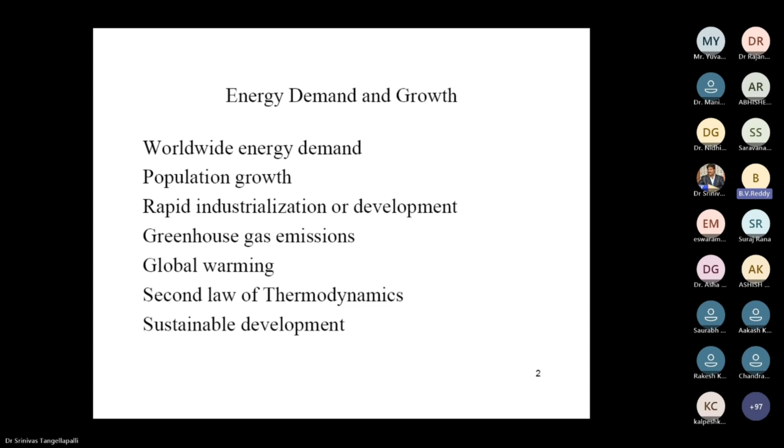And from time to time, when major countries, depending on how the political system comes, the system also has an impact. The previous US administration had a different view. Now the present administration thinks it's time to go after oil and gas again and use more of those resources. So again there will be more demand for them, more utilization of them.

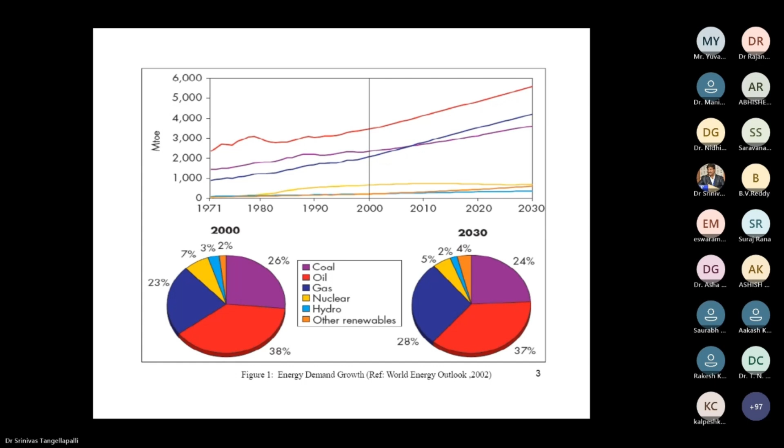So what I thought was, instead of straight away jumping into combined and multi-generation systems, which is where the growth is now, it's good to look at where we started. I'm not going to speak on this much, because this is what we typically teach energy students or in thermodynamics in general. People even today conduct a lot of research. Don't think that people are not doing research. They are.

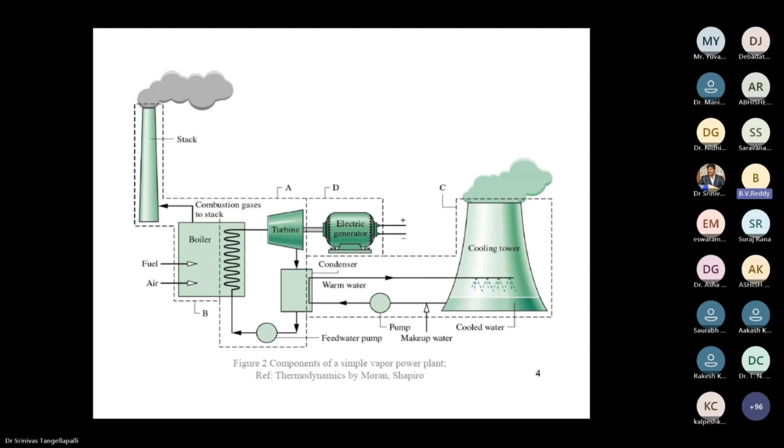So as I said, there are many people, from industries to universities, still doing research on cycle configurations, operating conditions, steam parameters, blade conditions, the role of advanced materials, all aimed to improve the efficiency so that emissions come down, economics improve, and many other things favor the system.

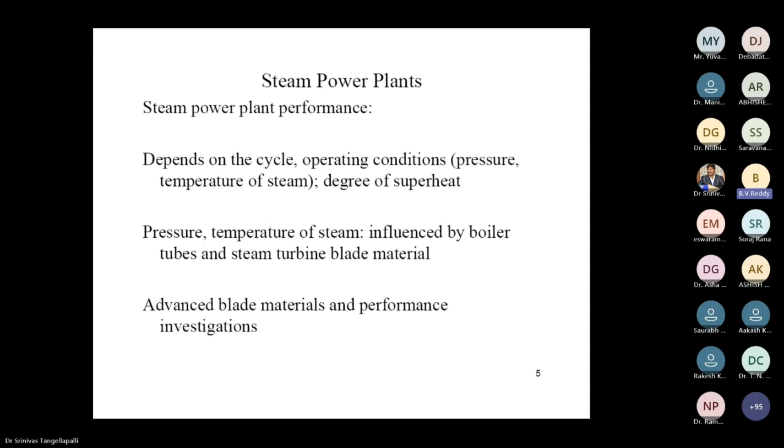Yeah, next one, please. Can you put the next slide before we come back to this slide, Srinivas? Yes.

So we control the air-fuel ratio in these combustion chambers. When the air-fuel ratio is controlled, the condition of the gases leaving, the pressure and temperature, is such that it meets the gas turbine blade requirements.

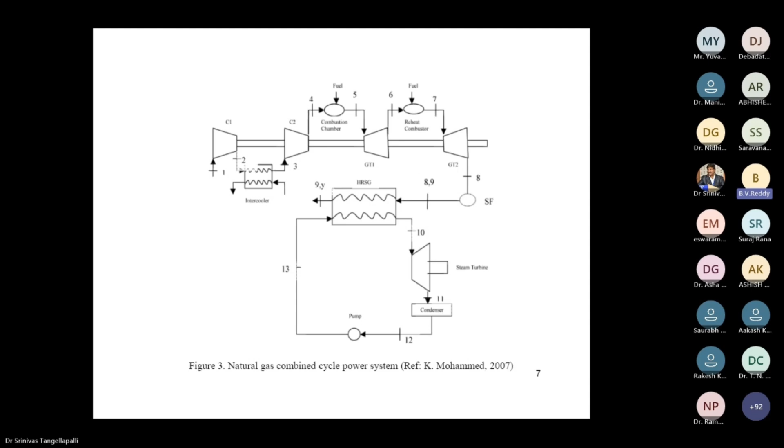Next slide, please. Yes. Oh, Srinivas, can you go back to the previous one?

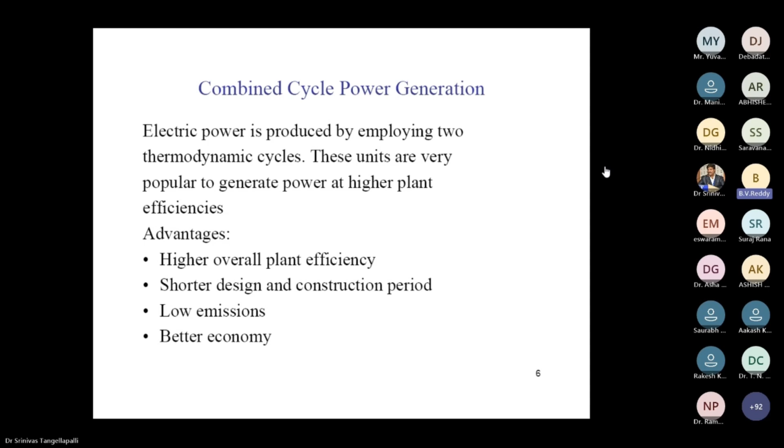Yes, no, the previous one. Okay. So now, keep in mind, this is how my approach is.

If we are attending any workshops, they're typically aimed to give not one equation and how to solve that equation in depth and get results. They should give you areas where developments are happening, opportunities are growing, so that depending on whatever role you may be, some of it will help you. So whatever the combined cycle I was speaking about, people are doing research, people are publishing, and as a participant, what is it that you will benefit other than just listening? There is a lot of research opportunity in these areas.

As I was saying, if it is a natural gas fired combined cycle, how do we address bringing down the emissions? Is there a way to co-fire? Yes, natural gas and biomass co-firing can be incorporated. I'll show you some of the work conducted by one of my postdocs in a few minutes. You can also look at different operating conditions, plant combinations, and see how the emissions will reduce, what impact it will have depending on what sort of biomass we are using, and the economic studies.

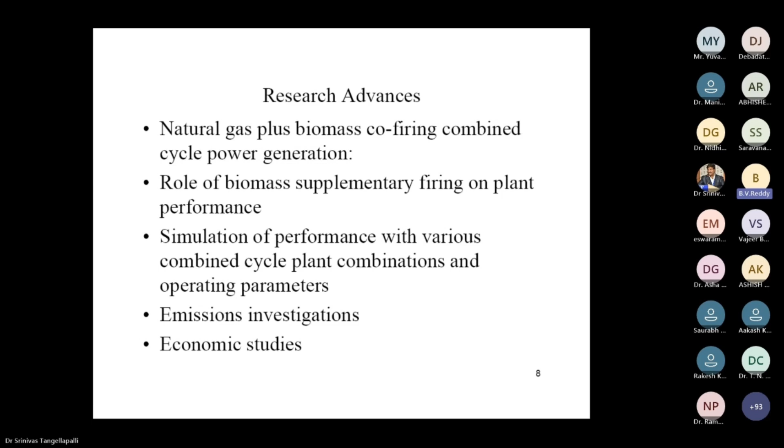So whatever titles you see here, all of these offer research opportunities. Given the little time a presenter will have, like 1 hour or 1.5 hours, they can't show all the research or papers. But I do share a lot of paper title links with Professor Srinivas later, so he can circulate them to interested participants afterwards. Next one, please.

If you notice this one, I had shown you a natural gas combined cycle. I explained the benefits associated with the combined cycle, what research people are doing, whether it is energy, exergy, supplementary firing, parameters, many things. Then I showed you why we need to think of utilizing biomass, because as you know, biomass is carbon neutral. Whatever CO2 it releases, it captures back when it is grown. So typically it is considered carbon neutral.

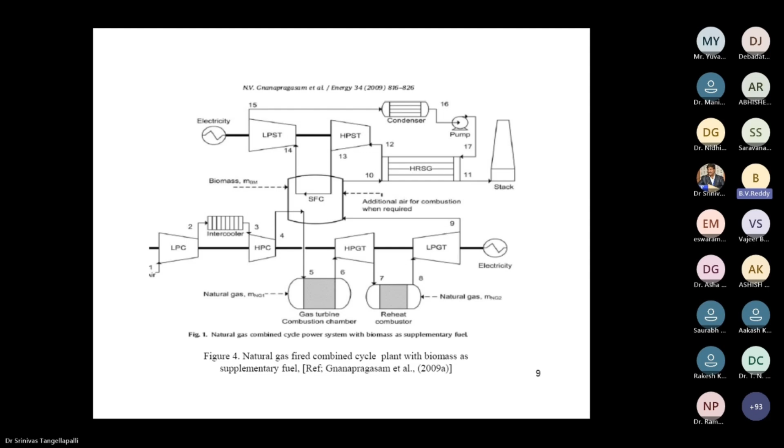This runs in pages of equations where this was a postdoc who worked with me and another professor, conducted a lot of research. It was published in a few journals. The story here is it leads to a lot of benefits.

In biomass, there are a lot of biomasses. For selected cases, natural gas is considered, with its typical composition and calorific value. Then selected biomasses were chosen, whether it is wheat straw, wood chips, or some other wood. Even within what we call typical biomass, it could be wheat husk or rice husk. What is wheat husk grown in North America versus what is grown in India or some other place? We need to do chemical analysis again. We simply can't use what is used in North America the same way as in other locations.

So the whole idea here is from a research point of view, analysis was proposed covering the chemical side, thermodynamic side, gasification side, all combinations involved. Different biomasses were used and studies were conducted, and it was found that biomass addition as a supplementary fuel to that combined cycle, originally fired only with natural gas, has a significant role in reducing carbon dioxide emissions, which is one of our main concerns today. So there's still a lot of scope to look into combination of the plant, combination of parameters, types of biomasses, and other things including economics. This area still offers a lot of opportunity for research investigations, projects, and publications.

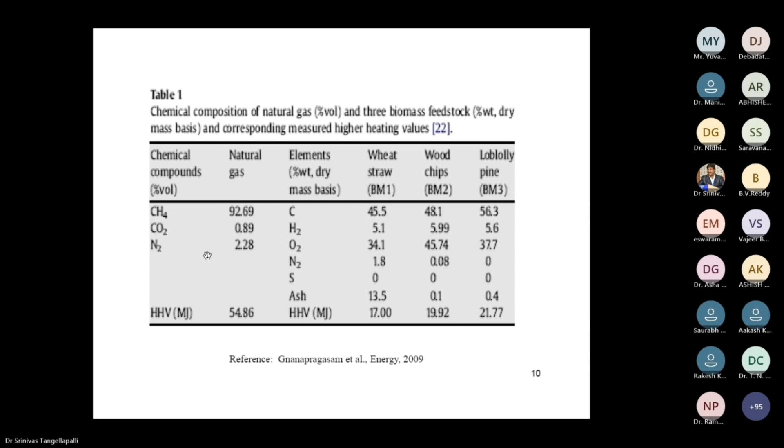In continuation, as I said, the way I put material is to link one after another. I started with natural gas combined cycle, which is a highly efficient technology, heavily used worldwide. Then I talked about how to reduce emissions, and we went on to biomass incorporation. Why only biomass? People talk a lot about solar. I know there's been a lot of interest in solar over the last 15, 20 years. It's one of the fastest growing renewable energy contributions in the energy mix of the globe, and in a lot of places that is mostly done through the PV route. But I'm not talking here about PV.

What is the way that solar can be incorporated into this combined cycle? If we can have natural gas with solar in a combined cycle mode, that also will benefit because solar is renewable. Depending on how we are clubbing it, how it is incorporated, what sort of role in the system, operating conditions, so many things come into play. Then one needs to compare - if it is a natural gas plant, let's say 600 megawatts, versus a solar-natural gas combination with different proportions, how do the economics and emissions look? So there is a lot to do here - apart from PV, solar can be utilized with fossil fuel power plants to bring down emissions. That means looking at this comparison.

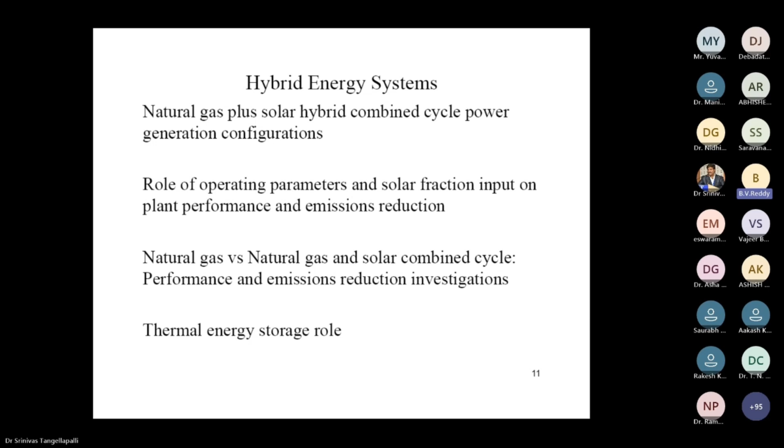And the last point - solar is available during daytime, not nighttime, but we generate power at night too. So there's a need to think about storing solar energy and using it when it's not available, like at nighttime. The whole story is from looking at configuration, to the role of the system, modeling and experiments, to comparing, to bringing in energy storage - all these areas have people conducting research, industries doing work, publishing, but still from a research and opportunity point of view, this area provides vast opportunity.

Yes, you can see this.

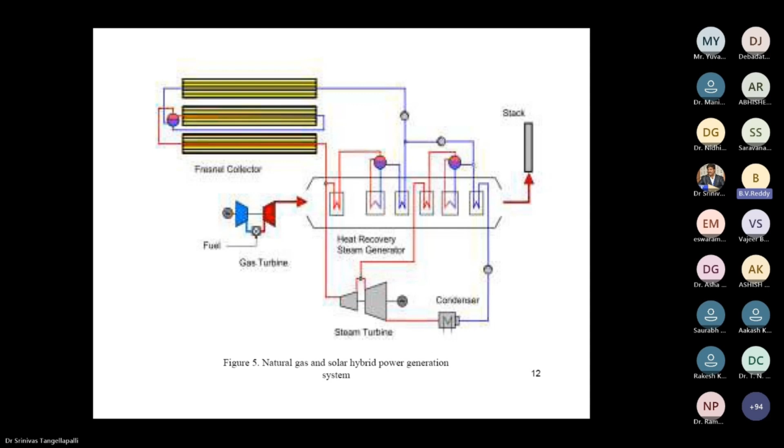So what I'm trying to say is, from a research point of view, not only having natural gas with biomass as combined or co-fired mode, there's a lot of room for natural gas with solar in a hybrid. What you see here, again, there could be many possible configurations, not one. You may see some work being done, but don't think that is the end of it - no, this is only a beginning. A lot of people are conducting a lot of research to contribute to seeing the role of different things.

So if you notice, I put combined cycle natural gas, then I went on to show modification using biomass and typical work. If I have time, I will click on the journal papers and go over them, but I will share all those paper titles with Professor Srinivas so he can share with you those titles, which you can download - these days most of you have access to the journals. Then I showed what developments are happening with natural gas combined with solar - that's a hybrid version of it. Now if you notice, this is a different system, but still going with the approach of combined cycle.

If you notice, first let me explain. As I said, people typically spend 6 to 8 months generating a lot of this work. When somebody is trying to speak in a few minutes, everything cannot be put in.

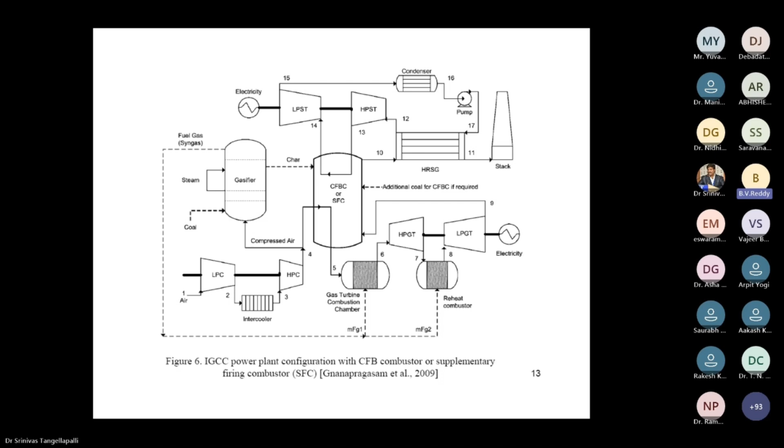Yes, that's where I put it in brief. As you can see, from gasification to doing system analysis, parametric modeling, thermodynamics. This one I won't talk about here. The hydrogen, I have another system where I'll be talking. As you people know, hydrogen is now one of the very popular growing energy technologies with a lot of attention paid, which I will be discussing a little bit. And the supplementary role: as I said, instead of coal, if you use biomass, there is a role to reduce emissions, CO2 particularly. Again, the type of biomass has an impact, and many other things.

And as I said, you have seen energy analysis here. There is also exergy, which I'll be speaking about at the end: why exergy in general is getting so popular. There are people doing a lot of exergy research, and Professor Srinivas is also one of them in India. So why does it become popular? That also I will explain.

So my whole point is to motivate you people. If you have systems like this, even if you consider a piece of it and try to make some contribution, like what is novel, what addition it contributes to what you see in the literature review, you can end up publishing in high-end journals. So there's tremendous room and scope, whether to get an industrial project or a government project, or for publishing.

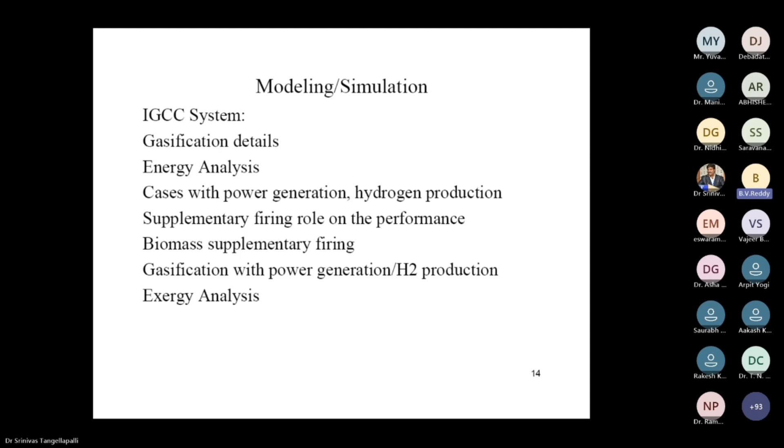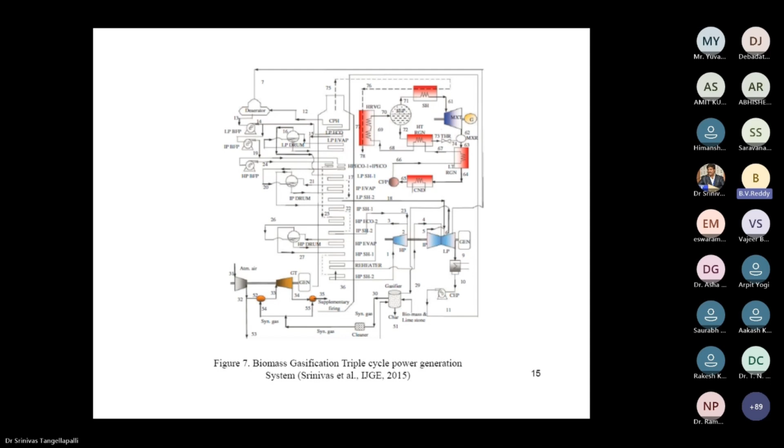Yes, I already gave a summary of that part of the work, but as I said, gasification, thermodynamic analysis, the role of the Kalina cycle, and the parameter supplementary role were all investigated in the paper. You can obtain the paper once you have the title of it from Professor Srinivas afterwards. As I said, I'll give the remaining papers too. Yeah, next one, please.

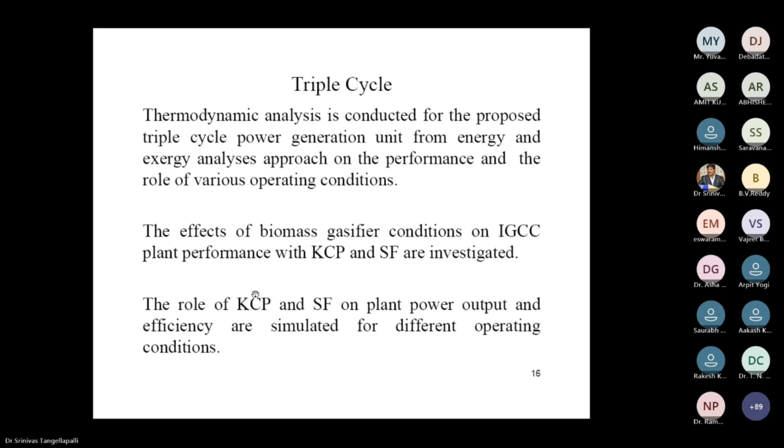Okay, so now, just give me a second. We are slowly heading into the next stage of discussion, where virtually very little research is done. That's where there's a vast opportunity. So from a simple steam power plant, typically in the 1880s, later combined cycles, then I said triple cycles research is being done. Okay, we will see that type of systems. Maybe it may take time. Now we are talking about multi-generation energy systems.

Now the question is, why are we interested in multi-generation? Keep in mind, conducting research, whether you are conducting it through a theoretical way, thermodynamic way, modeling way, or you are doing experiments, we always will have some system in mind and some objective in mind. We conduct, we analyze, we come up with conclusions, and then we publish. But sometimes it is also good to know, in a broader picture, the developments and what developments will happen in the future. So that way, sometimes it's good to go into areas where there's more opportunity.

So now these multi-generation energy systems are gaining popularity because in many cases, not only can we improve the overall performance, there is also the possibility to have usable side products or benefits. I could not put in combined cycle because of time limitation. There are some countries in the world where it was planned, say there are a few cities nearby, or there are some industries nearby. So you can also incorporate cogeneration. It is not only generating power using gas cycle, steam cycle.

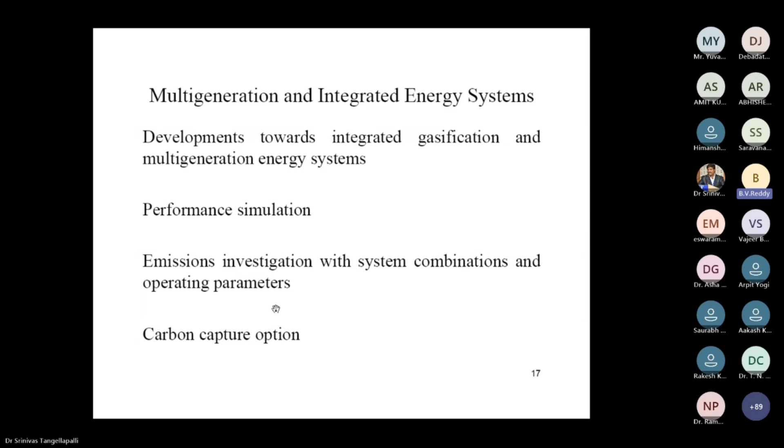Yeah, next one, please.

So now the whole aim is to gasify a solid fuel. Whatever unwanted things, these are going to be taken out, particularly ash, or what cannot be gasified. So if you notice, whenever we are gasifying a solid fuel, when the syngas is produced, as I said, gasification, though a lot of research goes on, is well proven, there are technologies available.

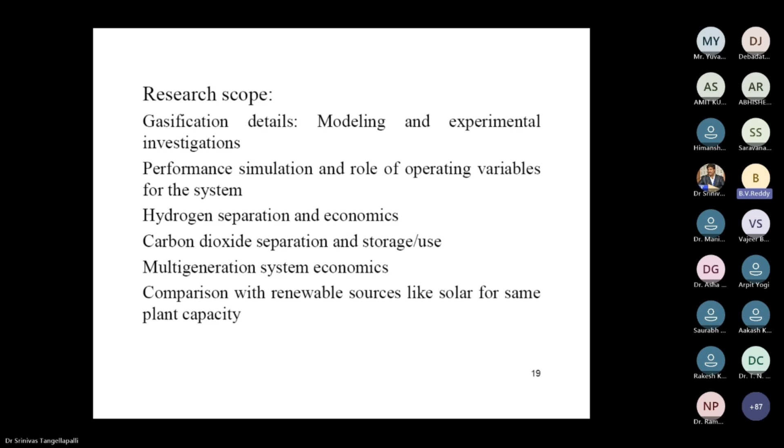I think in US, even in Canada, in pilot scale, but in US, I think somewhere for one coal-based power plant, they are collecting CO2, they are growing algae, they are producing biodiesel, they are trying to study the economics of the whole system, I think the last few years. Suppose if things favor, maybe that may be the route where you capture CO2 from fossil fuel based power plants, grow algae, then produce biodiesel, and ultimately make it virtually environment friendly.

Oh, I think Professor Srinivas, can you go back 1 minute to the previous slide? 1 minute. Yes. Yeah. I forgot to add two details here. I did talk what I wanted to talk.

But if you really look at this whole system, if we are going to have this multi-generation to the extent that we are capturing whatever CO2 this whole system produces, and we are able to take care of that captured CO2. Let's imagine for a moment, I'm not saying it may be that easy, but there is a possibility, as I said, if algae can be grown and biodiesel can be produced.

So if you look on that count, if it is a coal-based multi-generation system with CO2 capture and utilization, with basically no impact on the environment, then this is as good as a solar energy system. I'm not comparing economics. If economics also are going to compare, then what is wrong in it? In future, we may see coal-based systems going through this route when they can justify economically also, as, let us say, renewable systems. So that means there's a lot we need to do.

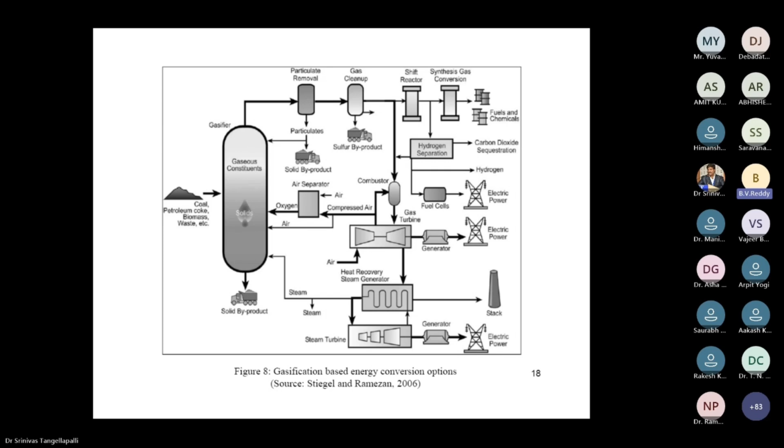That's where the future, whether it's 10, 20, 30 years, the next set of research will happen on all these multi-generation systems. Yeah, next one, please. Yes. So that is where, as I said, one has to compare with the renewables too.

I mean, anything these days, I have a paper, I will try to glance at it quickly, from one of my postdocs, on what you call sustainability indicators. So these days, for energy systems, we just don't comment on only performance and economics. We also need to look into the environment side, which is called sustainability indicators.

Okay, yeah. So now, having given at least some information, I hope some of that will benefit you people, from a simple power plant system to combined to hybrid to gasification, then on to multi-generation, with the scope, the opportunities, and the tremendous research objectives which can be conducted, now I just want to dwell a little bit. You may be hearing later in this workshop maybe about exergy or the second law.

Generally, when people talk about energy systems, thermal systems, they all try to give you some details on energy and exergy. So I will take only 10-15 minutes, maybe 15 minutes, on why exergy analysis is becoming popular. This is what you call second law analysis.

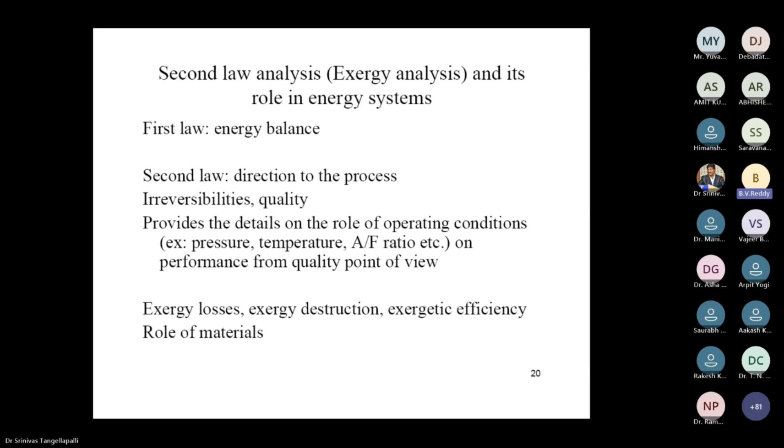So, as I said, with the first law we make an energy balance. With the second law, we look not only into the direction of the process, we look into the role of irreversibilities. You know what irreversibilities are, whether they are mixing, pressure drop, a reaction, or a lot of other things. The whole idea is these irreversibilities try to reduce what you call the quality. I'm not talking about steam quality, please. From the second law point of view, we are destroying the quality which otherwise could have been utilized. Next one, please.

I think, was there any slide? Oh, yeah. Okay. I think it comes next.

So let me just give it briefly. Don't think I'm trying to teach you exergy, because exergy these days is becoming very popular. You go to any recent thermodynamics book, you will see the procedure well laid out. Once you understand the meaning of the exergy definition, which I'll explain, conducting exergy analysis is not hard. It is very time-consuming. Things have to be calculated properly. Later, I think you have a session with Professor Srinivas. He may explain how much time it takes, because he has done a lot of work in this area.

To conduct exergy analysis, there is an approach. As all of you know, you know how to calculate availability. That is with reference to the surroundings. Before I define exergy, say you have a system at a temperature Ti and pressure Pi. By the time it reaches the surroundings, which you call temperature T0 and pressure P0, it has the ability to do something. Once it reaches the surroundings, though there may be potential, it cannot do anything.

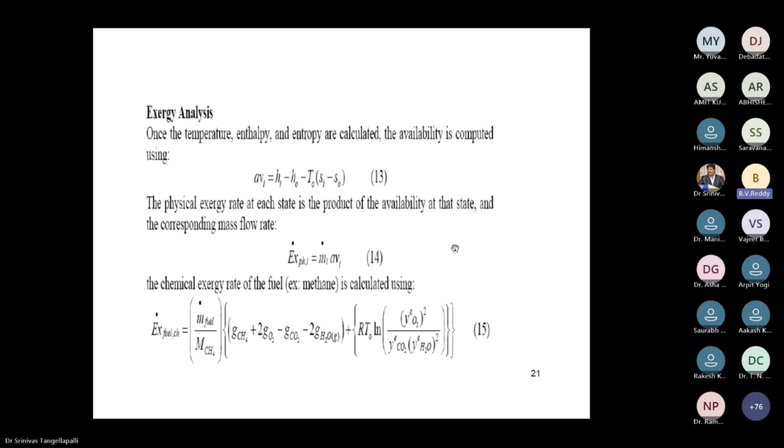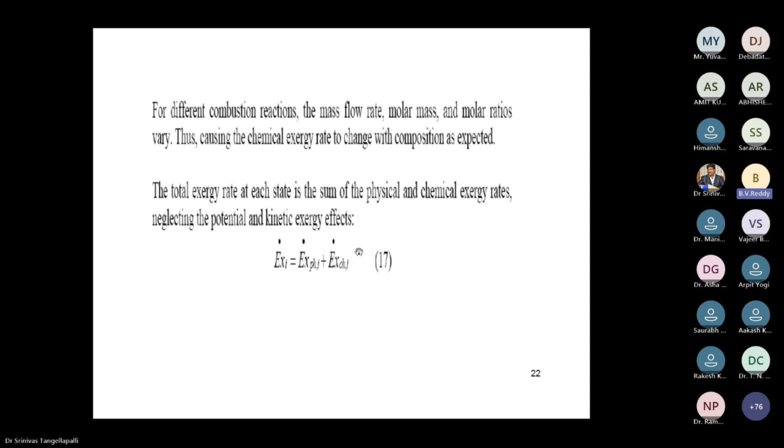As I said already, we typically neglect the kinetic and potential components given their contribution is so small. This is how at any location you can calculate the total exergy. So you are calculating at different locations, which means we need to know the physical and chemical exergy. There is a way, as I showed you in the previous slide, to estimate physical exergy, and then chemical is given by lots of relations or tables.

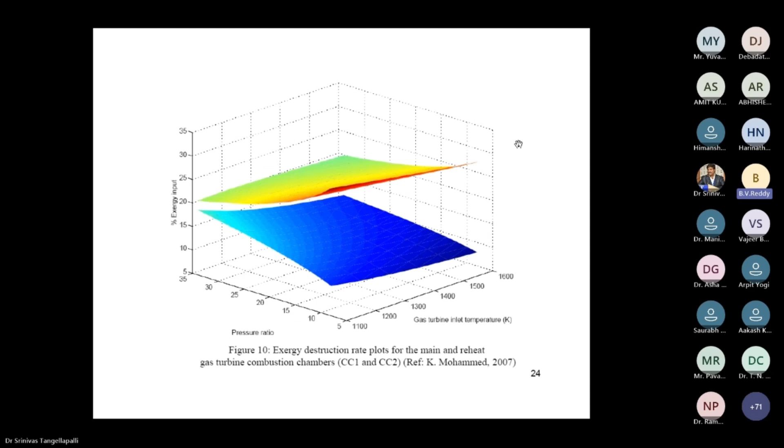If you go back and read literature, in the 70s and 80s gas turbine systems used to have very low temperature because the blade material was very poor. So when natural gas was supplied, the blade could accept only 800 degrees centigrade gases—that was its thermal limitation.

So when supplying natural gas, people used to supply more air just to dilute it and bring down the temperature to meet this requirement. This dilution and mixing is an irreversibility that destroys quality. Now, with a lot of advances in blade materials, we have temperatures as high as close to 1375 degrees centigrade.

That means there has been so much improvement in the materials field when applied here. So now we don't need to dilute as much—that means less mixing, less quality destruction, which means less entropy generation. So exergy-wise, you see the benefit.

So what I am trying to say is, sometimes the thermodynamics research we do, what we propose from a quality or exergy point of view, may help other fields develop further, or what develops in other fields we then try to use. So, yeah—you can go back to the slide where I was.

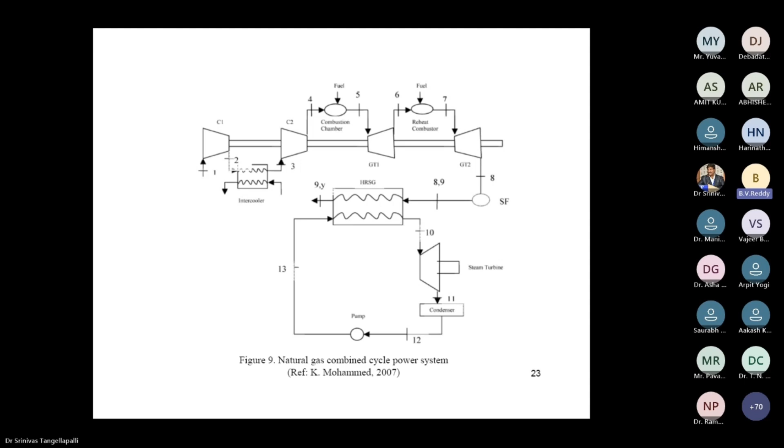No, the previous one. Yes. What I am trying to say is this is just for one system, for a combined cycle with one set of operating conditions. There are many systems—it's not just about polygeneration, thermal generation, or multi-energy.

Take any engineering system, any system—what you notice is there is room to conduct research using second law knowledge, exergy knowledge, that will provide much benefit.

I know there is a time restriction, but in general, I'll use just one word. Sometimes you notice organizations or individuals who are very successful, whether in research or whatever field. Don't think that it came just like that.

Time wastage, or how we use time, is one of the factors—second law thinking can be linked to it. People who utilize time in a productive way achieve much more. So it all comes down to this: second law is not just for engineering systems and machines, it can be utilized for humans too. That's the message I am trying to convey.

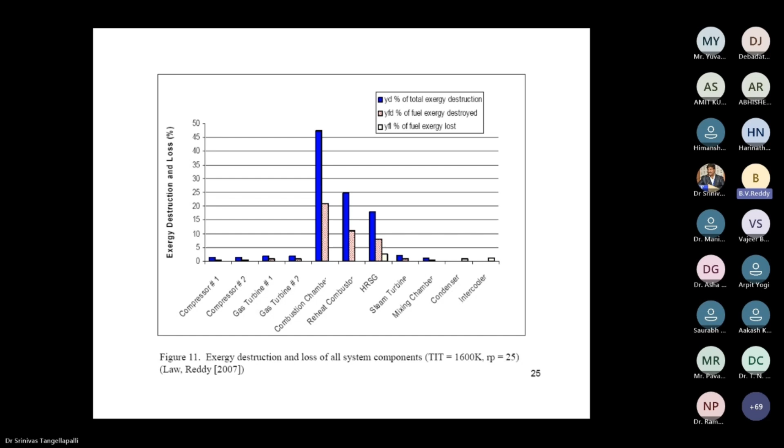There are many people working to develop indicators. Now, if we are going to talk about only renewable energy sources, renewable energy is what meets all our energy demand. There is no need to talk about any of these sustainable indicators because renewable energy is very sustainable, a friendly one. But still, it's going to be a long way. We will be using coal, natural gas, and oil. It's not going to be that easy.

We are going to get away from them given our growth, our demand, population, so many factors. So that means there are people developing a lot of these indicators, aimed to compare fossil fuel systems with as if it has been a renewable or a completely friendly one.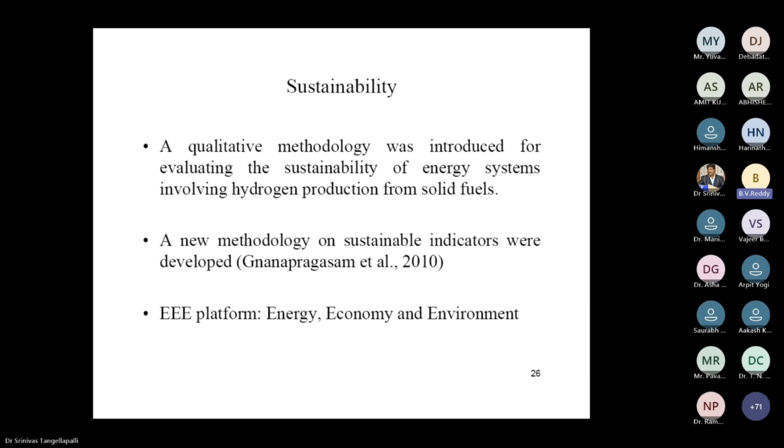Okay, so now if you see what opportunities—if you are wondering as a participant, as I said from the beginning, in between I used to add that—there is a lot of challenges, a lot of scope to conduct research, whether it is in multi-generation systems, integrated systems, or gasification. Now, as I said, I think I have a screen sharing problem, otherwise I could have put few of the other details.

So we talk these days hydrogen a lot. I don't know how many of you have looked into the literature, but even today, the hydrogen produced in the globe, out of 100%, only 4 to 5% comes from electrolysis of water, which is what is called the friendly approach.

Now the remaining 95 to 96% of hydrogen—47% of hydrogen is produced using natural gas through steam methane reforming process, SMR, as they call it. It's a very efficient, very cheap way to produce, but there is an issue associated: there's carbon dioxide, okay? And coal oil also contributes.

So now what you notice on this side is there is room. If we can produce hydrogen using solar or biomass, then we can reduce its dependency on at least coal, through the coal route. Or even if it is natural gas, we need to capture CO2, then look into economics.

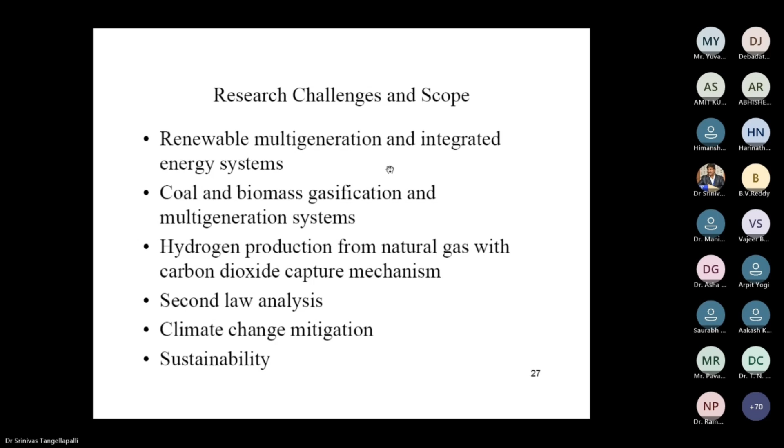Yes, so I think whatever I try to give, I don't have to state as separate conclusions—in between I was trying to give the hints. So there is a development towards more multi-generation and hybrid energy systems. That's where the future is going to be headed, to utilize a lot of these fossil fuels for sustainable living purpose. And this is not only experiments—modeling, simulation will count.

That's where not only energy, but exergy analysis will play a role. And typically when we are talking about harnessing renewables, particularly solar, given its intermittent nature—not available during night time—we need to have storage systems. So there has to be research on how to store solar energy and how to use it afterwards.

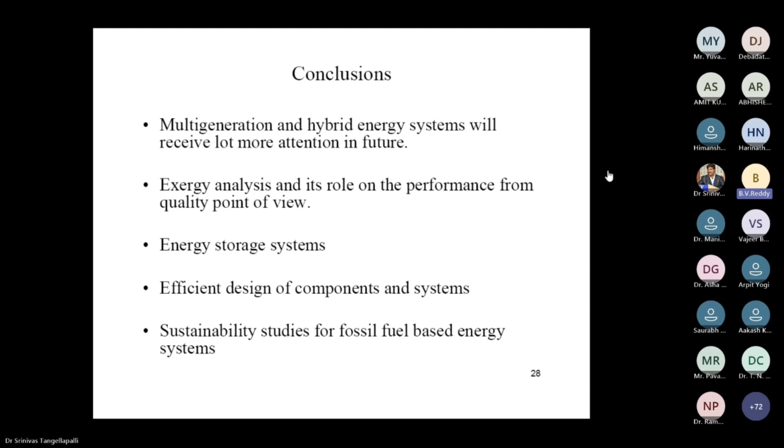And from a second law point of view, when research is done, that will lead to efficient design of components, overall systems, and sustainable, what you call...